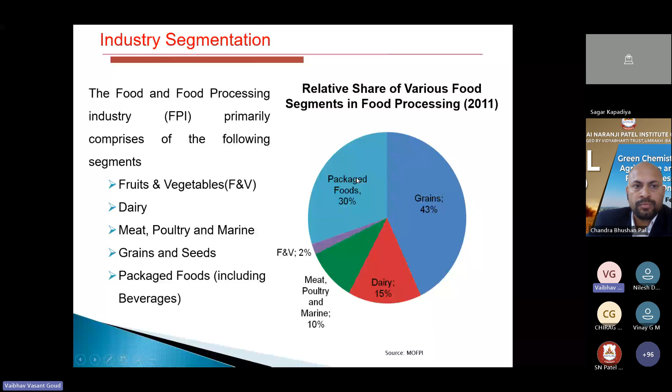So why is this topic important? Because with the current lifestyle, most of us are very health conscious, so we always try to go for very good quality food. Then we are discussing the separation processes.

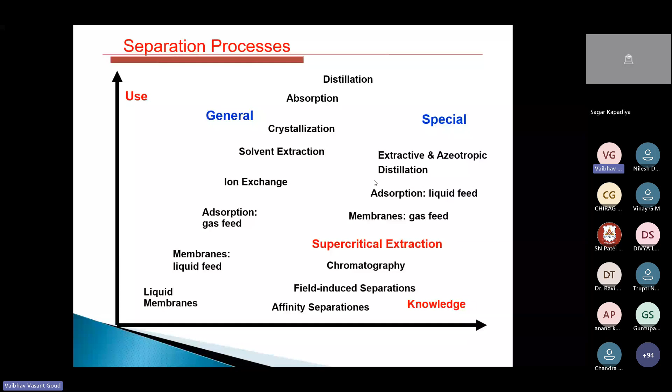And then if you see down the ladder till the liquid membranes, from distillation, then absorption, crystallization, solvent extraction, these are very well-known processes in the industry for separation. But now special attention is there because of certain regulations in the utilization of these processes. So now some switchover is also happening, and some special processes are getting special attention.

And because of that, we'll be discussing the special processes as well, which include extractive and azeotropic distillation. As you know, azeotropic distillation is very widely used, but extractive and azeotropic distillation as one combined process is being practiced nowadays, where you can do both things simultaneously. And research is also going on in this direction to improve the process efficiency as well as the separation efficiency.

Then adsorption, using the liquid feed, and membranes, using the gas feed. And now if you see here, the red one indicates supercritical extraction. This supercritical extraction has a very important role in food processing because of its green tag, that is, it is a greener process, and it is also very critical in terms of separation of compounds. So it is getting a lot of attention nowadays in food processing, and there are many successful plants running across the country for the extraction of essential compounds from the food matrix.

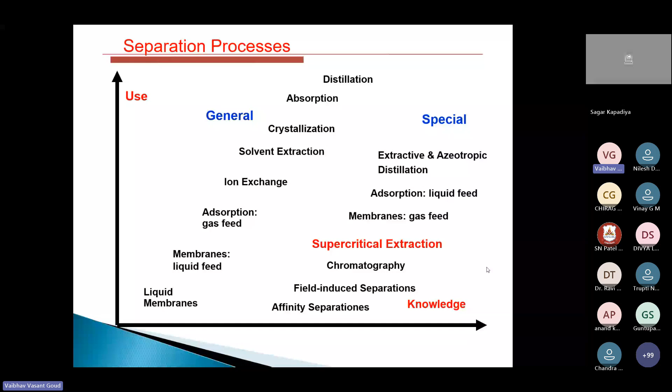But as we know, with time and because of the changing regulations of the industries, these traditional extraction technologies are now facing a lot of challenges. And these solvents also cause hazards to human health, because if traces of the solvent remain, that becomes a matter of concern to human health. With increasing concern about environmental pollution, and as these solvents always pose environmental hazards, there is always a need to find alternative solvents, or greener processes to the existing technologies.

And because of these strict regulations, the demand for supercritical food extraction technologies is increasing nowadays. Why is it so? Because these supercritical technologies are very safe. Why am I saying processes? Because in these processes we can use different solvents. It is not defined for a specific solvent. But as we know, mostly they use supercritical CO2 as a solvent.

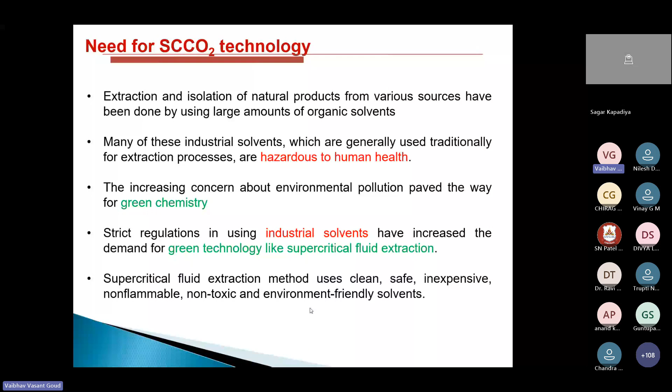So I need not go into detail about what a supercritical fluid is, because I hope most of you know about supercritical fluids and how exactly it is termed a supercritical fluid. But I will just brief you about this concept in a very short manner, because with any solvent you use, for example methanol, ethanol, water, or CO2,

when the temperature and pressure of these substances rise above the critical pressure and temperature, because every solvent has a critical point, right? So once it reaches that point, and if you go on further increasing the temperature and pressure beyond that point, the substance enters into a supercritical state. Below that it is sometimes called a subcritical state.

So if you see the literature, sometimes it is referred to as subcritical, because if it is below its critical point, we term it the subcritical range of the solvent or substance. And when it reaches the critical point, we call it the critical temperature and pressure. But once it goes beyond that critical point, it's supercritical now. It has reached the supercritical state of the substance.

So this fluid has the advantage that it shows both gas-like and liquid-like properties, and that is the main advantage of supercritical fluid. Although it is a single fluid, it behaves like a gas and a liquid. It acts with gas properties as well as liquid properties, and that helps in the extraction.

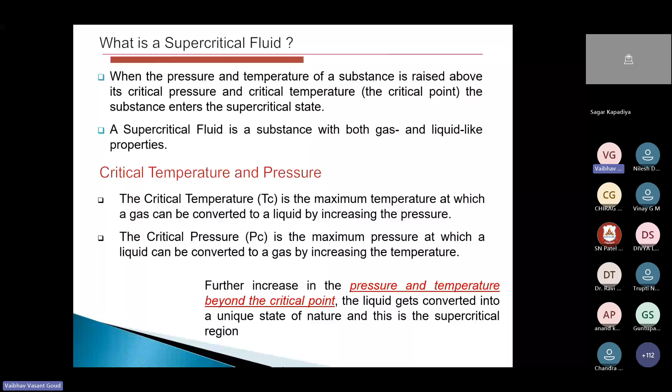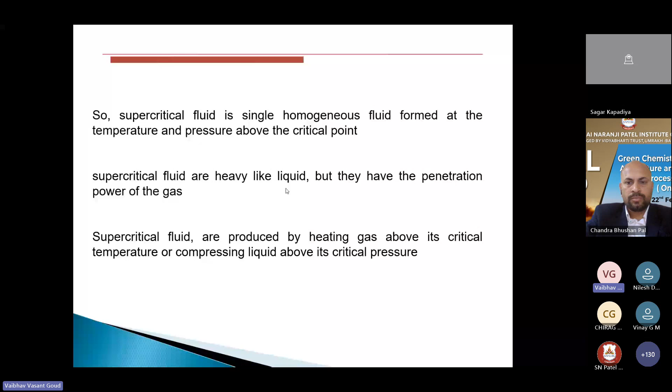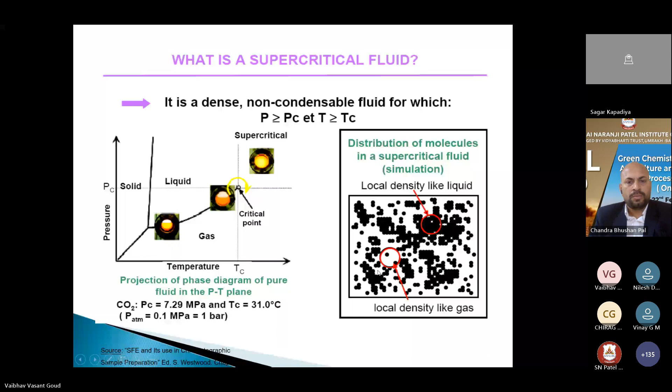The excellent transport properties, because as you know, it behaves like a gas-like viscosity, so the transport becomes very easy in terms of the penetration of the gas into the molecules, and it is like around 10 to 100 times less than the liquid, and also has a gas-like diffusivity, which I already mentioned.

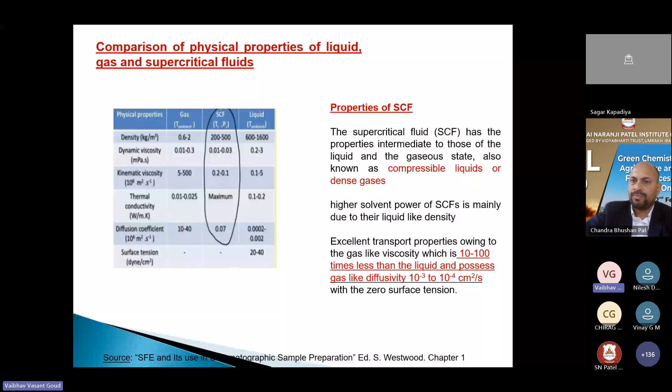The diffusion coefficient is very good for this kind of fluids, and zero surface tension, which is a very unique property for this kind of fluid, because the liquid always has certain kind of surface tension. But when you talk about the supercritical fluid, the surface tension is nil. Basically, it's zero, and that becomes a very essential property for this particular extraction as well.

Now, the critical parameters of these common fluids, if you see, because always we try to see the density as well as pressure and the temperature as the critical parameter for any kind of fluid when you are trying to use in the supercritical system. For example, like CO2, when you are using CO2, its temperature, as I already mentioned. So the density, if you see here, is like close to 0.47. So one can imagine the density of this particular fluid compared to that of the water, right?

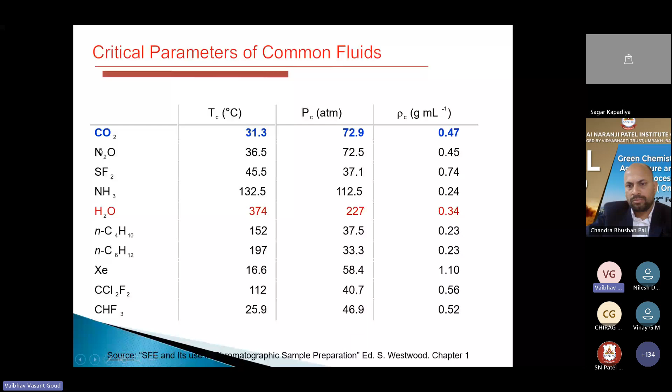Even if you try to compare the density of the supercritical water, it is even far less than that of the CO2. And because of this nature of this fluid, this water is also acting as a very good solvent for the supercritical extraction. And a lot of work is also going on in this particular field, not only limited to food processing, but other applications as well. But CO2 mostly is being used in the case of food processing, but water has other applications as well, not limited to food processing only.

And other solvents which are listed here can also be used as a supercritical fluid for the extraction purpose. But then for the environment friendly nature, as well as to understand the food processing part of it, mostly CO2 and H2O are being studied widely.

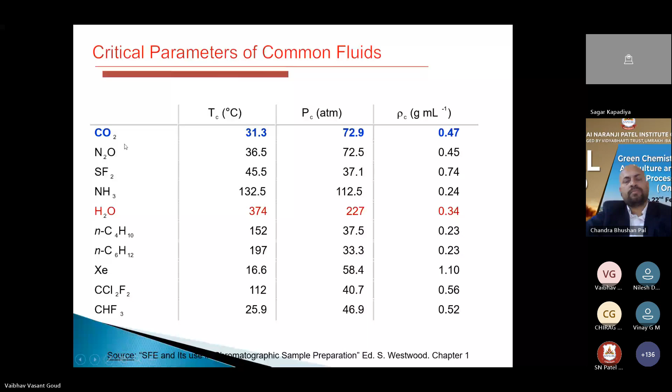So why is CO2 the most commonly used, as I already mentioned, in food processing? Because it is inert, non-reactive, right? Inert means it's non-reactive, inexpensive, easily available, odorless, it has no odor at all, tasteless as well, and environment friendly. So E stands for environment friendly solvent, and it has very low energy input. Because of that, this is being preferred, or even the water supercritical fluid. And there is no solvent residue in the food after the extraction.

That means when you try to do the supercritical CO2 extraction using the food matrix or in food processing, you cannot see any traces of solvents left over in the extracted food matrix, because once it reaches room temperature, the entire CO2 becomes CO2 gas, and it comes out from the food matrix automatically. So that is the advantage of this particular fluid as well.

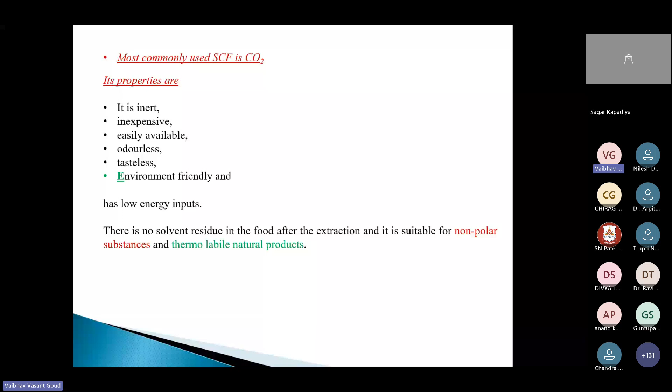And it is suitable for non-polar substances and thermolabile natural products as well, because some compounds are very heat sensitive, so you cannot extract those specific compounds from those particular natural substances. So in such conditions, you have to always rely on the supercritical CO2 technique, because the temperature, if you see, is close to only 31 degrees to the max.

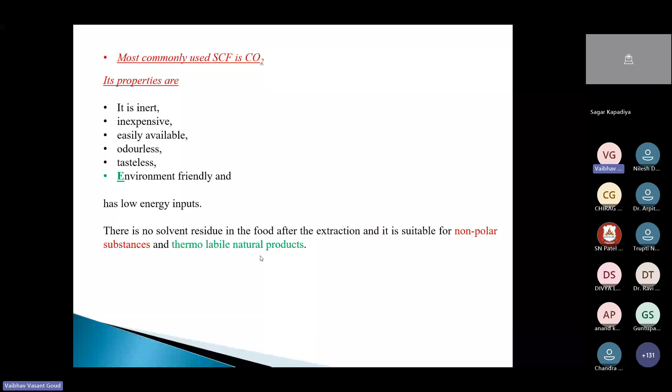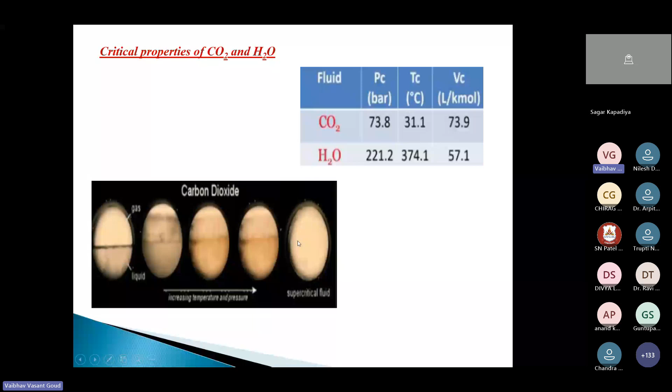So here, just to show, this way it changes the properties of this substance and forms a very homogeneous phase. Now you cannot distinguish where is the gas and where is the liquid. So I can show this in a stepwise manner. Here we can see the separate phase of the carbon dioxide. This bottom portion is carbon dioxide, and this is basically empty space on the top. And this meniscus is easily observed here.

Now with a slight increase in the temperature, this layer begins to diminish. Although you can see a small layer here, some part of it already got converted into a gas, right? If I further increase the temperature, this causes the gas and liquid densities to become more similar, and the meniscus is less easily observed, but still it is evident because you can still see this line, which shows there is still some presence of liquid CO2.

But once it reaches the critical temperature and pressure, so this phase shows the critical temperature and pressure have been reached, the two distinct phases of liquid and gas are no longer visible. It is completely a homogeneous mixture, called a one phase mixture. And once it reaches such a state, that is called the supercritical fluid state of this substance.

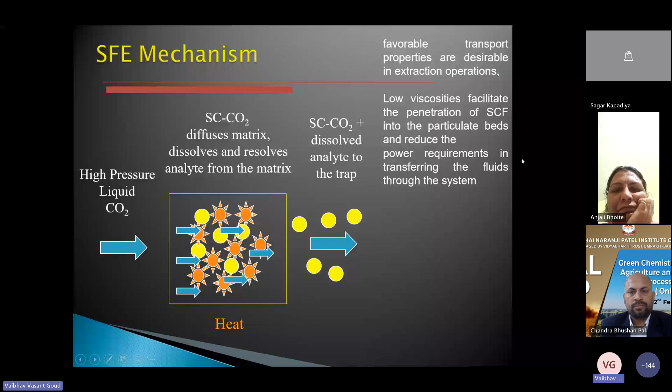And once I release that particular gas now, the CO2 will come out from the particular reactor along with this analyte, the dissolved analyte, I would say. And once it comes out, I can dissolve this in a specific solvent, which is an environment-friendly solvent. So these yellow dotted compounds will get dissolved in that, and the CO2, which is not soluble in that solvent, will come out from the solvent automatically. So that way also you can do the extraction of the materials or components using this particular fluid stage.

So, for example, here, as I told earlier as well, this is called trapping of the solids in a specific medium. So, once this particular compound along with the CO2 and analyte enters into this blue solvent here, the compound should be soluble in this solvent; that kind of solvent you need to select. And hence, once it gets solubilized, automatically the CO2 will get released from this particular compound, the yellow points here. And then this CO2 will get released out automatically from here.

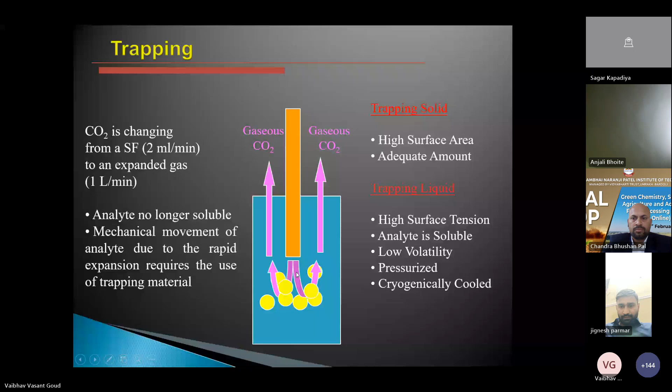So this is how trapping of the selective materials can be done in the case of supercritical CO2 as well. I will also show you in one of the slides how you can do it very selectively. So favorable transport properties of CO2 means low viscosities. It facilitates the penetration of this supercritical fluid into the particulate beds and reduces the power requirement in transferring this fluid through the system.

And because of the gas-like behavior of the supercritical fluid, the diffusivity increases, and it increases the mass transfer as well. Say, for example, if I am allowing this supercritical CO2 and the material to be extracted to reach equilibrium, during the stages of approaching equilibrium, most of the material present in the food matrix will get extracted by this CO2 phase, right? And once it is extracted, I can simply release this material into another vessel, at normal conditions rather than room temperature. I will mention normal conditions.

So once it reaches normal conditions, the liquid CO2 basically becomes gaseous CO2, because at normal conditions you cannot liquefy CO2. CO2 liquefaction can be done at a relatively lower temperature. You need to bring the temperature down to even -5 or -10 degrees; only then can you liquefy this CO2. Okay, so once it reaches 30 degrees, it's nothing but a gaseous form. So the entire CO2 will come out from that matrix, and it will separate out your analyte very easily. And that is why this process increases the extraction efficiency of the material as well.

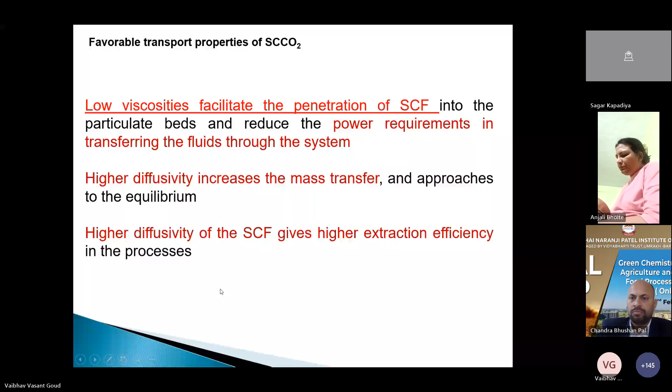So I hope all are able to listen to me. Yes, sir. Okay. Yes, sir.

So the equilibrium is basically expressed in terms of the solubility of the component at a given temperature and pressure. Okay. So there are three main rules to be applied for this supercritical CO2 technique, because the solubility of lower molecular weight, or low polarity organic compounds, like for example carbohydrates, alcohols, carboxylic acids, esters, aldehydes, which basically have low polarity, is very high in supercritical CO2. Because of that, they get extracted very easily, because supercritical CO2 behaves in the non-polar range, and these are completely miscible.

They get extracted very easily from this kind of material. So the macromolecules, like highly polar molecules, sugar, starches, proteins, salts, are not soluble and hence remain in the food matrix. So basically, if you want to extract a specific ester molecule from any substance which has a mixture of sugar, starch, proteins, you can easily extract these esters using this technique, because the others will remain untouched because of the non-solubility of these materials in supercritical CO2, right?

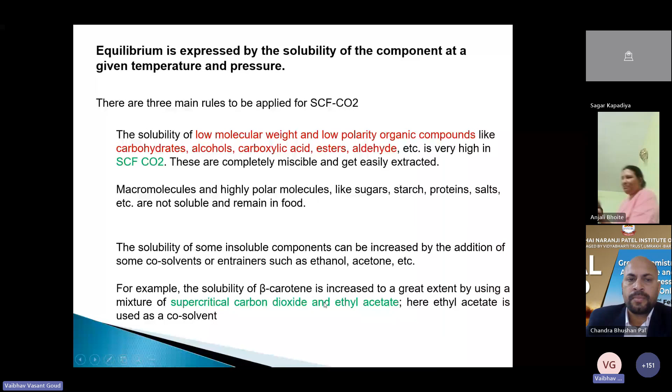So that needs to be done by using a co-solvent. That's why it is called a co-solvent in some literature, and elsewhere it is called entrainers. Both terminologies are the same. For example, if you are looking for beta carotene, its solubility is increased to a great extent by using a mixture of supercritical carbon dioxide and ethyl acetate, because here ethyl acetate is acting as a co-solvent.

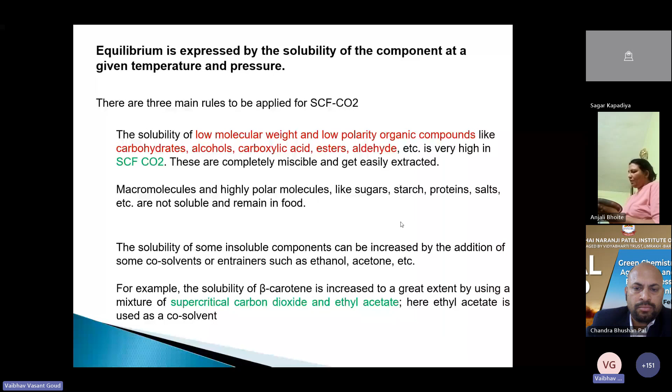If you try to do it only with supercritical CO2, you may find that the entire beta carotene may not get extracted because of its slight polarity. Once you add a co-solvent, it fine tunes the properties of the supercritical fluid, which helps in the extraction. The normally used entrainer is mostly ethanol, but sometimes ethyl acetate is also used for the extraction of the compound.

Superior product quality means this technique can extract the compound in a delicate way, and it helps maintain freshness close to the natural compound, because we have not added any kind of solvent, and whatever solvent we added got evaporated during the course. Because of that, you won't find any traces left behind in the extract. It mimics the freshness of the natural material, with high concentration of the desired active components and no residual solvent.

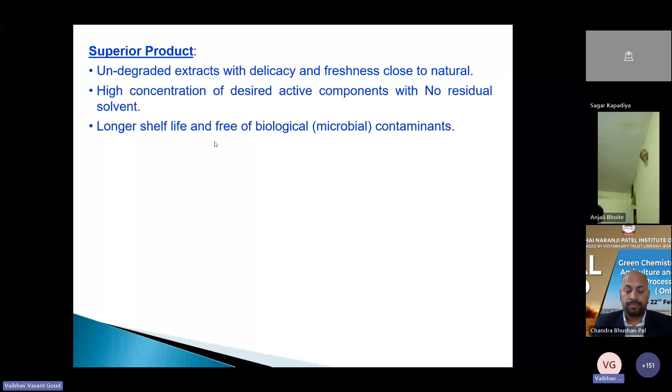As I told you, you can even increase the concentration of the desired active component by fine tuning the properties of the supercritical fluid. Longer shelf life is a very important point because it is free of biological contaminants. This extraction helps increase the shelf life of the product because it is not contaminated by any microbial contamination, and we also observed in our studies that shelf life increased drastically when using this kind of solvent for extraction.

A superior process in terms of simultaneous fractionation of the extract is possible in a single step, which I will describe in one of the slides. Fractionation and extraction in one cycle, or in a single step, is also possible with supercritical CO2. Why is it called fractionation? For example, I gave the example of extracting esters and protein in one go, that is, in one step.

Although I'm extracting both together, with fractionation I want both materials in separate vessels once they come out. That is possible because these compounds are different; the ester has some properties and the protein has different properties, and because of the difference in solubility, the material got solubilized into this fluid. So once I change the temperature in the fractionating vessel, the specific material gets separated out, because it cannot remain soluble beyond that particular temperature and pressure.

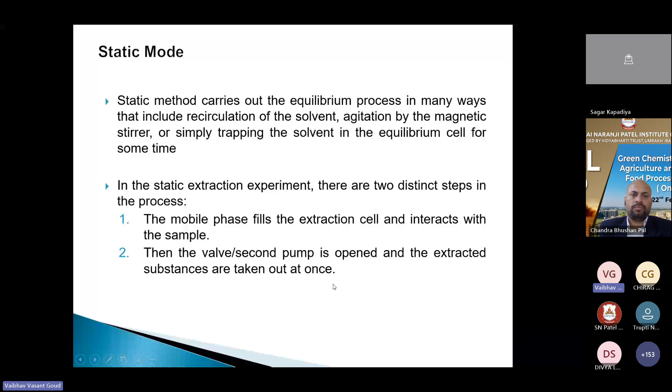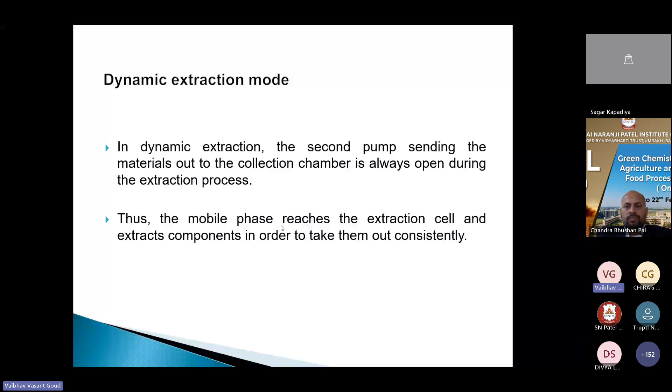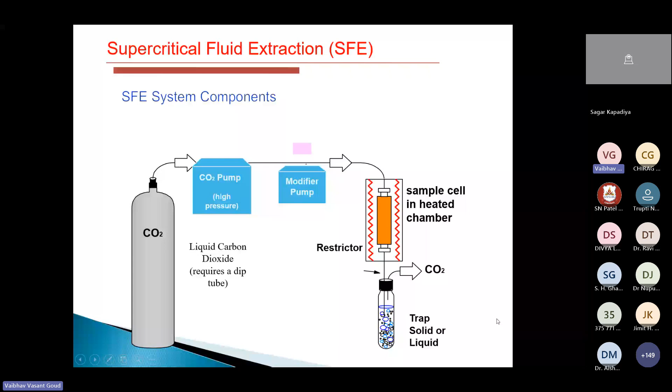Decaffeination is largely carried out using supercritical CO2. Okay. Another part is the extraction of oleoresin from spices, and then fractionating it into the fixed and essential oil components. Yeah, this is a very good point. I can give you the example of fractionation here, because when you try to extract oleoresin from any kind of spice, it is very difficult to get only essential oil in the extraction. Sometimes you also get the fixed oil.

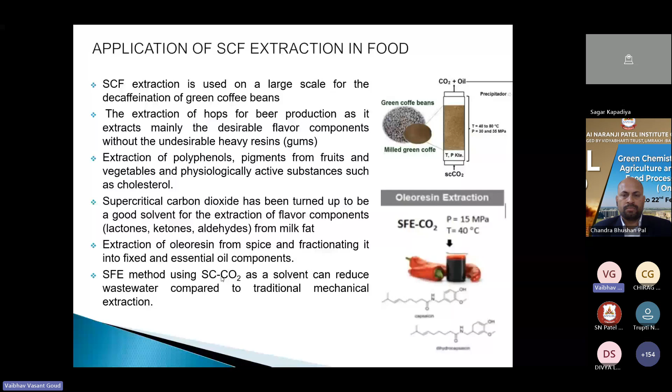The supercritical fluid method using CO2 as a solvent can reduce the wastewater compared to traditional mechanical extraction, and this is a very common example nowadays for extraction, because there is no role of water in the entire processing. So wastewater generation is very minimal using these processes. Sometimes these methods are also used to extract polyphenols and pigments from waste fruits, waste flowers, and vegetables. These are very well-known examples of extraction.

So what are the advantages of supercritical fluid extraction over solvent extraction? There are multiple advantages, as we have discussed in some of the slides, because it replaces the organic solvent. That is one of the most important points, and also the complete and easy recovery of the solvent from the extract or the raffinate. Both are possible in this case.

And this is a very rapid process. You don't need to continue the process for 8 hours, 10 hours just to reach equilibrium of the extraction. Here, equilibrium can be reached at a faster rate because of the solvency power of supercritical CO2, and it can be used as a continuous process as well. It is suitable for the extraction and purification of low volatile components, as in the example of the essential oil from the fixed oil.

But this may not be possible when you use hexane, because with hexane the essential oil and the fixed oil will come together. And again, you need to go for separation, called downstream processing, using some mode of separation, like distillation or maybe a membrane process, but that can be minimized using supercritical CO2.

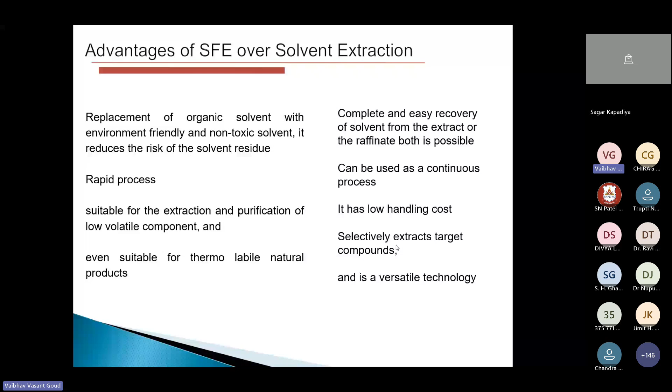But some precautions need to be taken while doing this process. You need to provide adequate contact time of the solvent with the substance, or the solid particles under consideration for extraction, so that diffusion of the solute from inside the solid particles to the solvent takes place very effectively. If you don't provide sufficient time, the extraction may not be effective, and equilibrium should be achieved.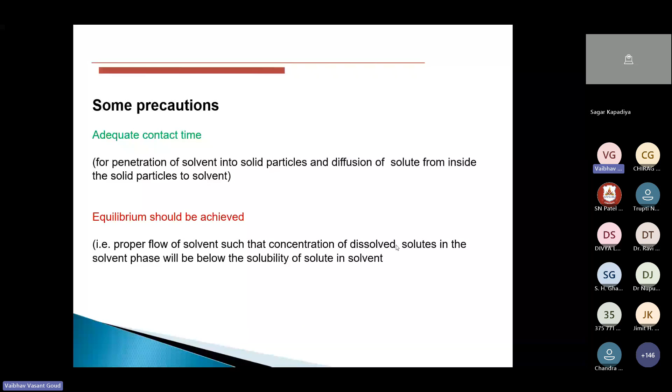This is very important and needs to be studied effectively in the supercritical CO2 technique, because the equilibrium for each component may not be the same. So you need to study it systematically using optimization tools. You can do a simulation first using a standard compound, and see what type of equilibrium needs to be achieved for these kinds of solutes. Based on that, you can plan the experiment as well.

So for example, why use a modifier? I want to give one small example, because a triglyceride also has phospholipids present in it. When you extract the triglyceride molecules, you also require the phospholipids to be present. Suppose R1 and R2 are non-polar, but R3 in that case is a slightly polar molecule.

So if you have to extract these together, you need to make use of some kind of modifier, so it will take away R1 and R2 as well as R3 together. Otherwise, this will remain in the substance without getting affected. The triglyceride will get extracted very effectively, but this will remain because of the polar nature of this particular group, right? So for that reason, this fine tuning is required so that you can take away these two entities together from the substance.

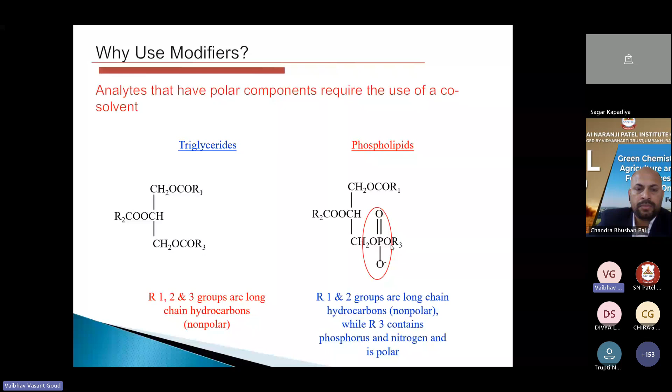So as I gave the example, co-solvents are always added to CO2 to enhance the extraction efficiency, but please make sure that the percentage of this co-solvent is limited to up to 10%. I have even recommended not to exceed more than 8%, because we tested this and once it reached 10%, we always saw a change in the critical nature of the CO2 as well. This we have experienced from our experimentation. And then it affects the extraction efficiency as well as the extraction yield.

So just to expand the extraction range to include the more polar lipids, you can add these kinds of solvents, but limit them. Sometimes people refer to 20% of the solvent, but then it can no longer be called a critical state of the substance, because it has already diluted that critical stage. The organic modifiers always increase the complexity of the experimental model that determines the supercritical CO2 extraction parameters. That's the reason I mentioned that adding this kind of modifier increases the complexity of the supercritical nature of the substance altogether. So the percentage should not go beyond this range.

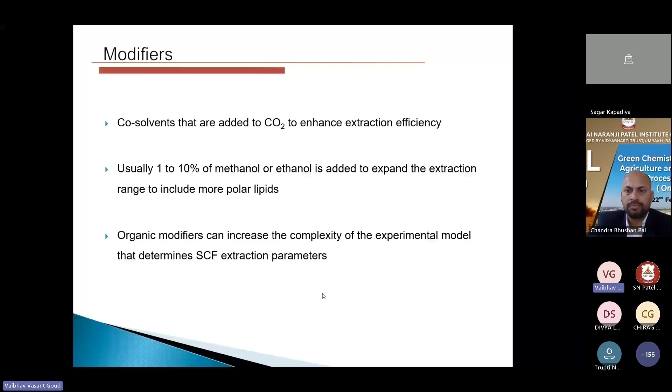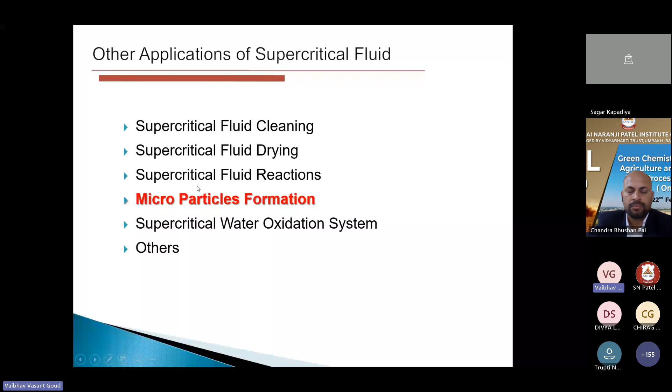Apart from that, as I told, this technique is also used to formulate microparticles. It is also used in drying, reactions, cleaning, and water oxidation systems. But we try to make use of it for particulate formulation here. For that purpose you require RESS, that is, rapid expansion of a supercritical solution. You have to expand this solution at a very rapid rate so that it forms a nano powder inside the chamber. Any active ingredient which needs to be converted into a nano powder in encapsulated form, we use this RESS system for that. Otherwise, if you are just doing extraction, we use a normal extraction technique.

This nozzle here is basically a diamond nozzle, so it handles very high temperature and pressure, and it won't get affected by that pressure and temperature. When you purge CO2 through the active ingredients, the CO2 takes the active ingredient along with it and solubilizes it, and once it reaches this chamber, we do the rapid expansion of the solution. Once you do the rapid expansion, the CO2 gets separated out, and whatever soluble ingredients were carried with the CO2 get separated out easily in the form of this nano powder.

Okay. So because of this rapid supersaturation, it forms a fine, monodispersed powder inside this chamber. You can achieve very fine nanoparticles based on the diameter and size of the nozzle, shown by these yellow spots here. So based on that, you can change the size of this nanopowder as well. We tried this with oleoresin encapsulation in our lab as well.

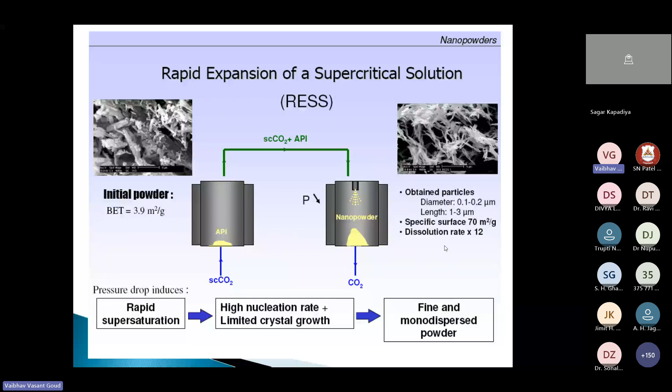And the supercritical anti-solvent technique is another technique used here, as in the example of the organic solvent. Sometimes we can also use an organic solvent along with the active ingredient, because some active ingredients are soluble in organic solvents, so that can be used in this case. And we can also prepare fine nanoparticles using this kind of technique. That is called SAS, supercritical anti-solvent, and the rapid expansion of the supercritical solution is called RESS. RESS and SAS are very commonly used technologies in supercritical systems.

So this is about the supercritical stage. I will just quickly show you the work we have done in our lab in 1 or 2 minutes. As I told you, when you have to do the fractionation, how to do the fractionation here. This shows the volatile oil, and this shows the fixed oil, that is oleoresin, which can be extracted from the ginger here. So we have optimized the entire process here, and we have scaled it up even to 40 folds than that of the lab scale, using the commercial operation in one of the industries in the north.

And then if you see here, this is basically an extraction vessel. The entire extraction is carried out in this particular vessel. And once it reaches a first fractionator here, now I can tune the temperature of the fractionator, where we can put the pressure of 175 bar and 40 degrees C. Okay, and we can now tune the temperature and the pressure of this second fractionator here, that is 40 bar and the CO2.

So what happens in this case is, what we observe at this pressure and temperature, this oleoresin is no longer soluble, because when we have done the extraction, we have done the extraction at 275 bar or 276 bar, where the oleoresin is easily soluble in this supercritical CO2 stage. And once it reaches this particular pressure, that is 175, this oleoresin gets separated out from the supercritical CO2. But essentially, the volatile oil still remains in the CO2, because at this pressure and temperature, the volatile oil is still soluble in the CO2.

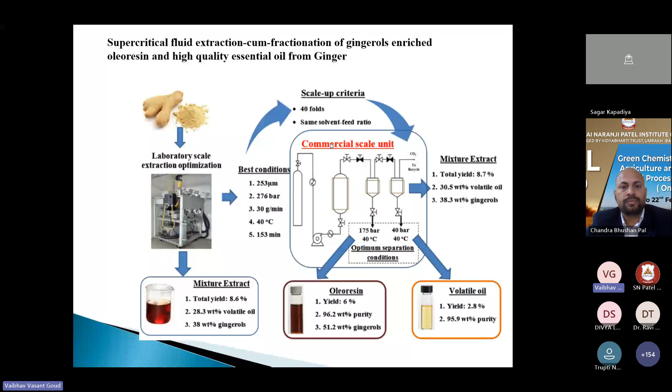Okay, and this is the advantage of this particular technique. You don't need to go for a separate separation technique, downstreaming of this particular one. And this shows further, if you want to extract in multiple ways, we can go on increasing the fractionators here. You can change the temperature and pressure accordingly. You can just separate out the compounds, and that is what we have done. The first separator, second, accordingly we have done this separation, and we could achieve a very good separation of the volatile oils as well as the oleoresins.

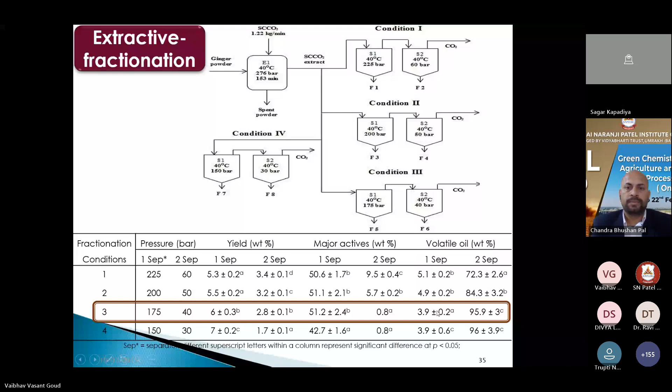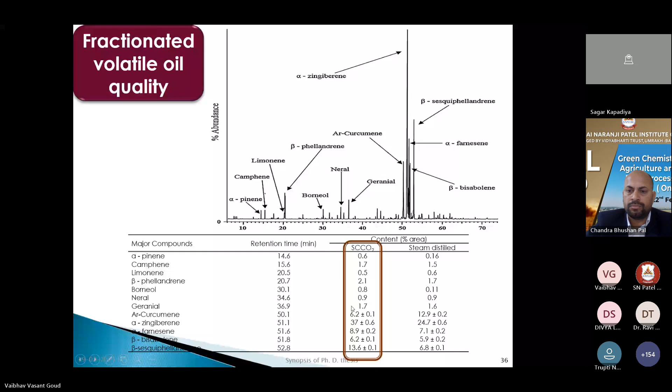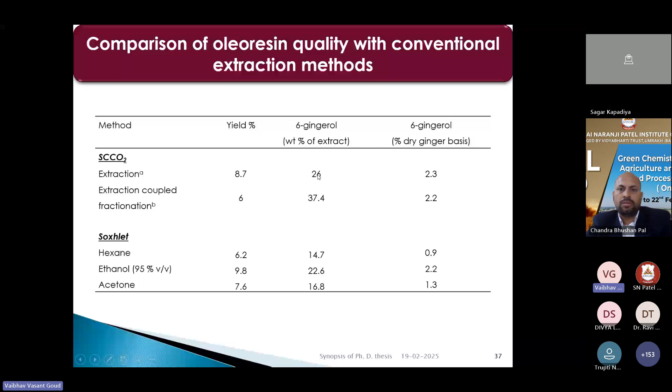Similarly, we have extracted the citronella oil, because this is a very widely known oil, from the citronella grass. This we have done using the subcritical water technology, not with the supercritical CO2. And surprisingly, we were able to extract citronellol, geraniol, limonene, and linalool in very high quantity using this subcritical water technology, without any disintegration of the product. The product remained intact, like its natural product.

But we have not done it in the supercritical stage; we have done it with subcritical water technology. We have not reached the critical point here. Below that point only we tried to do the extraction because of the thermal nature of the particular compounds. We did not study at a higher temperature range.

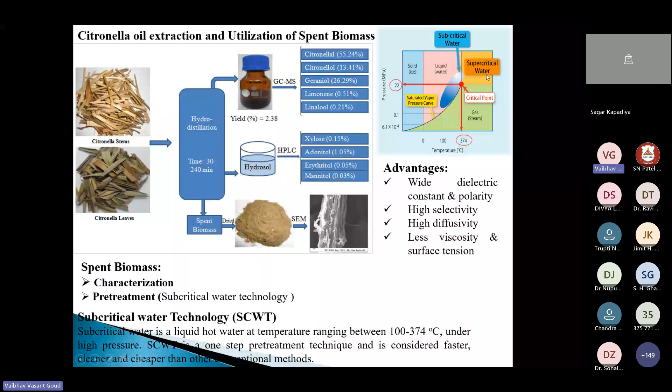So this is just the experimental setup. I wanted to show you how we did it in the water stage, because for CO2 it is a different one, as we know. Here, this yellow part indicates the solvent plus solute together, and once the reaction continues, the extraction happens, and then we purge the inert environment in this particular reactor, right?

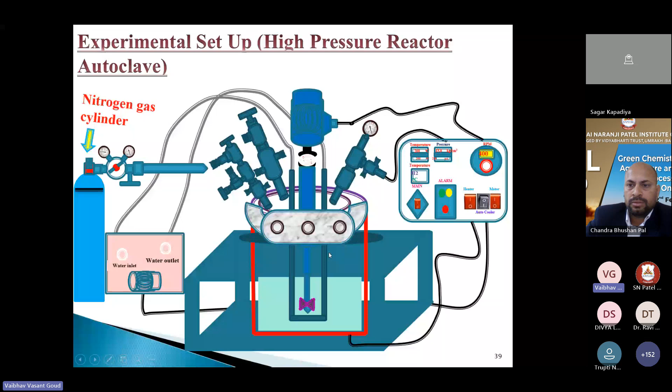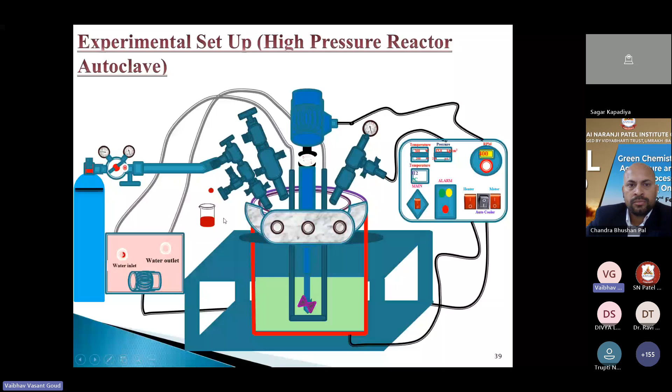Then the gas, as you can see, comes out from here, and then we pump the sample out. We can collect the sample here and analyze intermittently how the reaction is happening in the case of supercritical water as well. That way we have studied this particular concept. Okay. And these are just the experimental part of it. I will not go into detail, because this is very widely published literature available in most of the journals now.

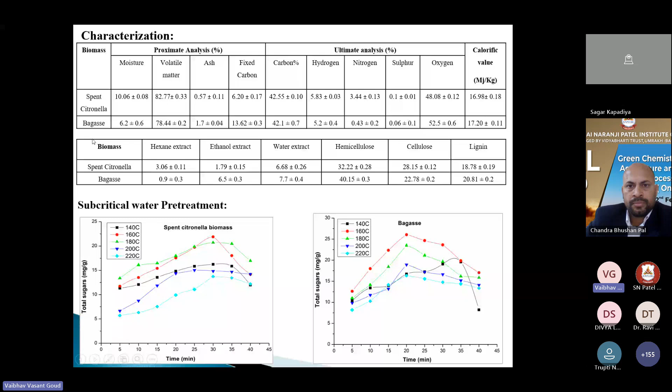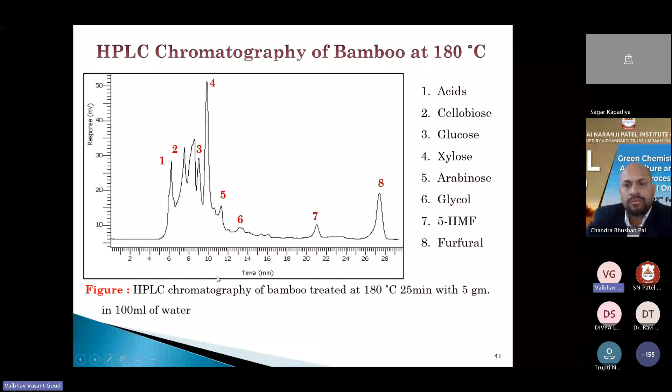Similarly, we have done subcritical water with bamboo biomass to extract components like cellobiose, glucose, xylose; these kinds of compounds we also tried to extract from bamboo biomass using supercritical water technology in our laboratory. So as I mentioned, the scope is not limited. We have wider application of these technologies, not limited to only food.

You can go for other applications as well. These are some references and acknowledgement to our past students from the lab, and DBT and DST for the financial support in terms of projects. Our collaborators, Professor Naik from IIT Delhi and Professor Raut from CIMAP Lucknow, help us in the analysis of some of the compounds regularly. Professor Naik helps us with technical advice on supercritical technology whenever it is required.